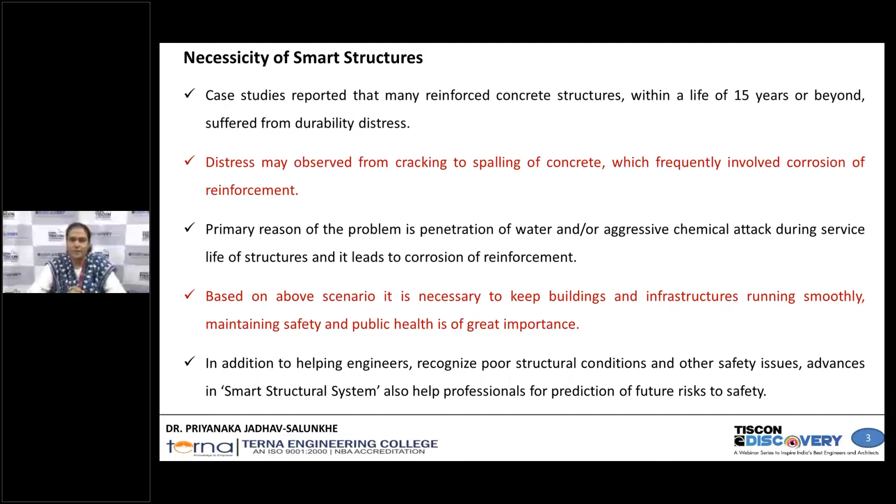Now let's see the concept of the smart structure. This smart structure system or community is fairly new, that's why many engineering professionals are attracted to it because of its innovative technologies. This smart structure incorporates the sensing phenomenon, actuation, along with electronic transfer processes, as well as we can say the control unit.

This new generation of system shows innovative functions such as sensing, actuating, along with shape morphing, vibration control, buckling control, along with advanced structural health monitoring. In addition, these smart structures develop special stiffness and strain in the structure which cannot be seen in conventional materials or conventional structures. This is the plus point of using a smart structure. If we want to define a smart structure generally, it is a structure which is able to sense external stimuli and act appropriately according to those changes to control the structural responses.

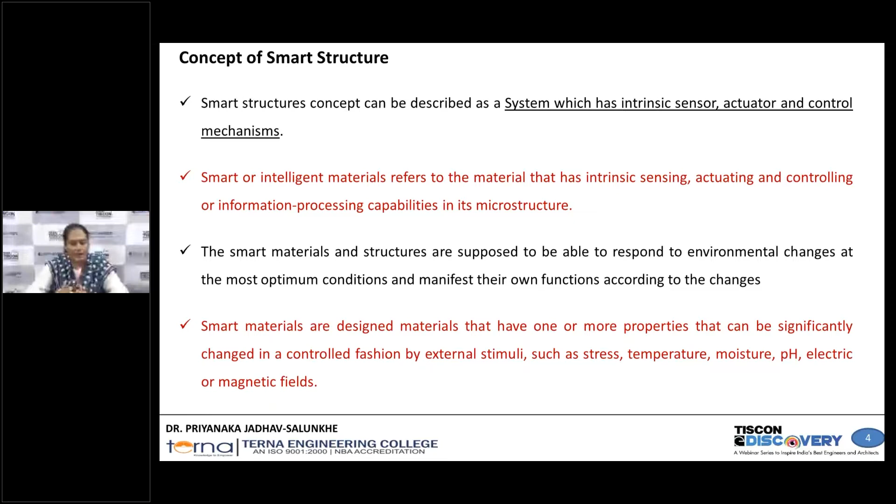Now let's see what is the current need and what is the current program set out to develop smart structures. This idea of the smart structure is adopted from nature, and it is based on the stimuli and response capability of living organisms. At the same time, researchers are taking effort to develop this system based on the example of mimicking living organisms. For example, take the example of a human body - the responses and stimuli of the body are controlled by the brain with the help of neuron systems present in the body. So based on this research, based on this theme, researchers are developing smart structures.

Let's see what is the ultimate aim, or what is the focus behind that.

Ultimately there is need of a structural member that possesses enhancement in the deformation capacity and ductility, higher damage tolerance, decreased residual crack size, and recovered or reduced permanent deformations. These are the functions we can expect in smart structural systems.

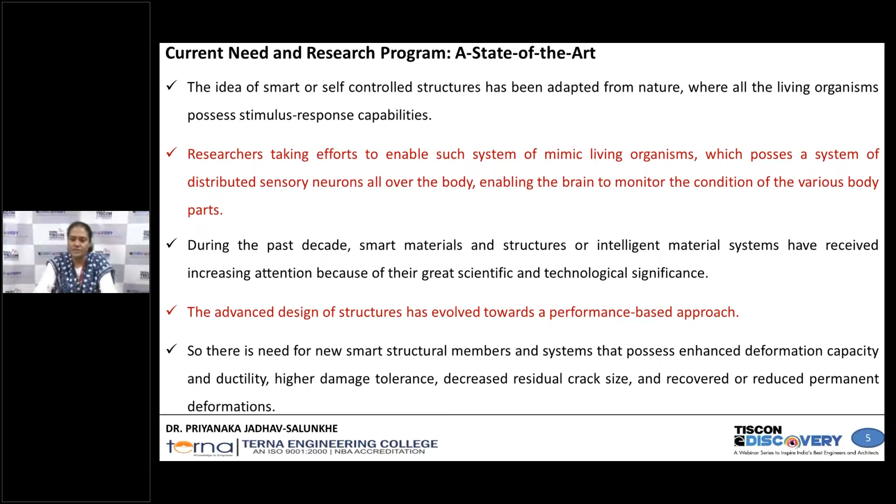Similarly, if we compare this life example with structures, suppose we use poor building materials, or conventional materials, with no monitoring, no preventive measures, no timely repair and restoration or rehabilitation of the structures. What happens? It results in the short and unsafe life of the structure.

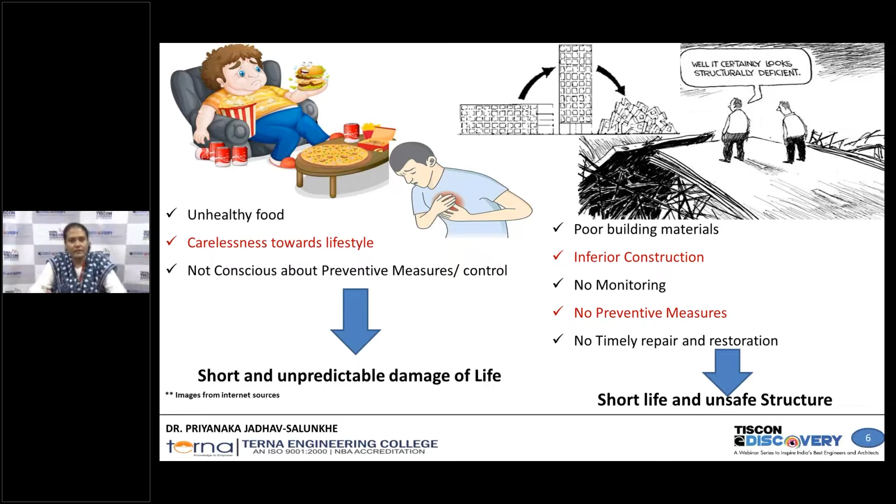Similarly, if we compare this human anatomy with the smart structure, if we use smart materials, there is regular and real-time monitoring of the structure. Preventive measures will apply, and timely repair and restoration of the structures is possible, only due to the use of smart materials in the structures. And it results in what? Long and safe life of the structure.

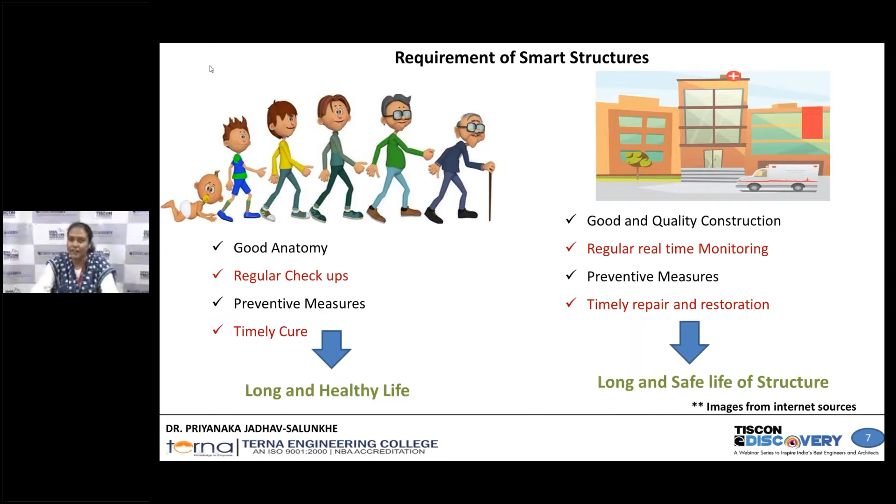So this structural system can sense the external stimuli in terms of stresses, strains, maybe vibration, etc. Corrosion potential is also there, electric magnetic field, based on different properties. So this external stimuli can be sensed by the sensor, and this sensed stimuli is transferred to the electronic transfer system, or we can say transferred to the control unit.

Here, after analysis, the control function can be provided to the actuator, and the actuator will behave according to the control functions, and the particular stimuli can be controlled. So this is the loop system, and this overall system is called a smart structural system. Here we can control the responses in terms of motion change, vibration, deflection, surface tension, etc.

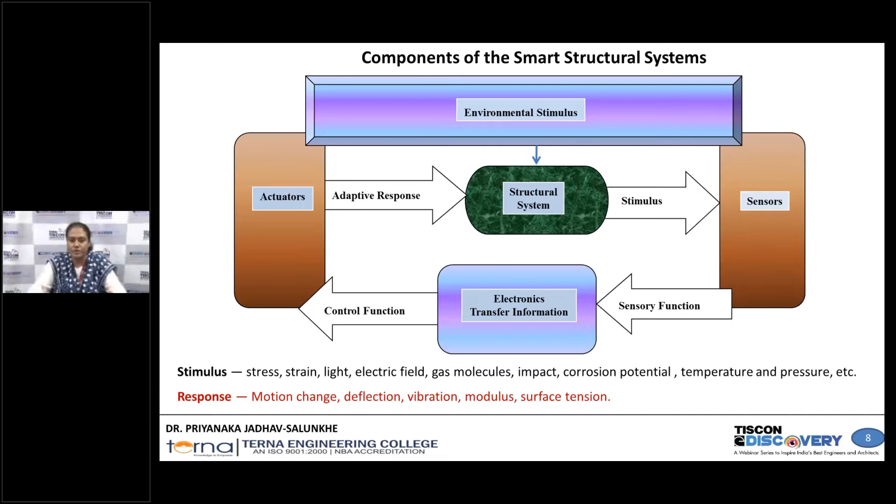Now let's see the classification of the smart structural system. As I discussed, based on its working phenomenon, this structure is divided into different parts or points. See, smart passive system: this system has the ability to respond to stimuli and behave in an appropriate manner without any assistance of a control unit or feedback system.

In the active system, smart active system, this system utilizes the feedback loop, and after analysis the control can happen, so this system is called a smart active system.

Now what is the smart intelligent system? It is exactly similar to the smart active system, but the system itself is able to control the external stimuli and the responses as per the demand of that particular structure. So it uses the nonlinear properties of the sensors as well as actuators. This is the very advanced intelligence system, that's why it is called a smart intelligent system.

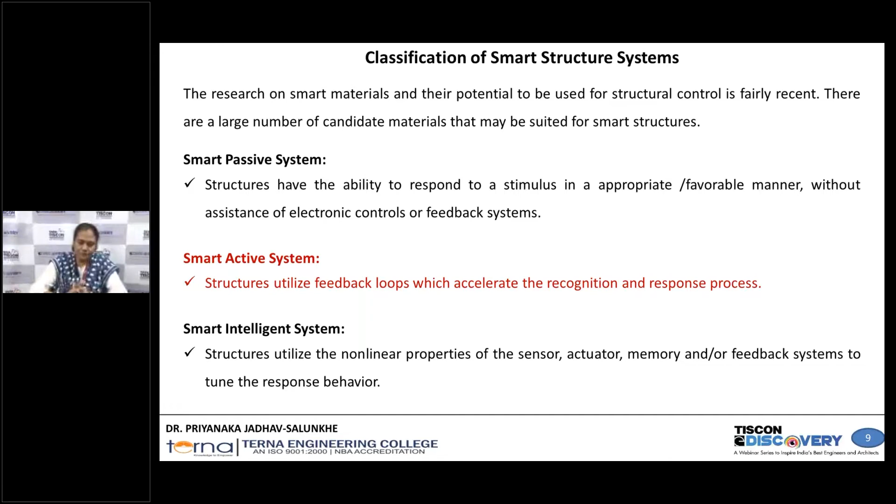Now let's start the discussion regarding smart materials. There are different materials available, for example, smart piezoelectric materials, shape memory alloy, magnetostrictive material, electrostrictive materials, magnetorheological fluids, electrorheological fluids, etc. Generally these materials are used in infrastructures and are suitable for use there. But in this webinar, I am focusing on the piezoelectric material and shape memory alloy simultaneously.

Now let's see what is meant by piezoelectric material. Piezo is a Greek word meaning pressure, and piezoelectricity relates to pressure-electricity. This material converts mechanical responses to electrical charges, and simultaneously, if provided an electric field, mechanical deformation may develop. These phenomena are called the converse and direct piezoelectric phenomenon.

So let's see the application of the piezoelectric material. It helps the structure to convert the force into electricity, to convert the vibration into electricity, as well as convert the temperature into electricity, right? This piezoelectric material can be used as a sensor as well as actuator because of its direct and converse piezoelectric phenomenon.

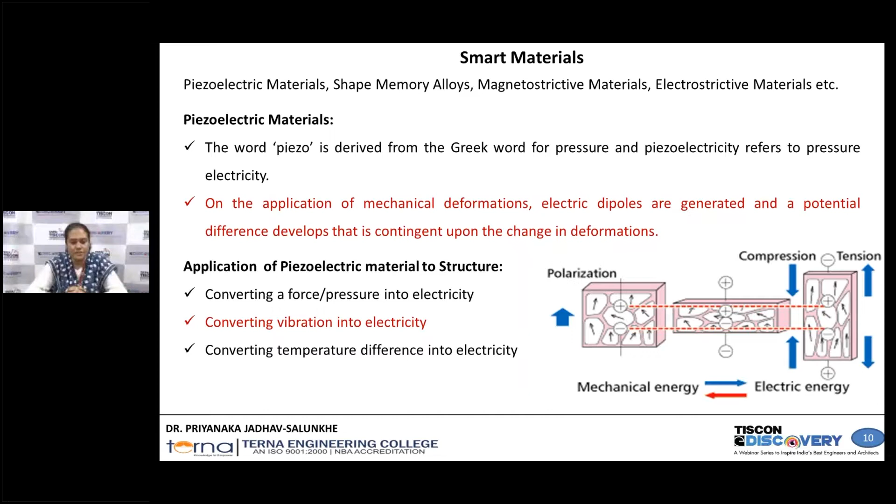There is a well-known piezoelectric material, that is quartz, but generally for structural engineering applications, the materials used are lithium niobate, zinc oxide, aluminum nitride, lead zirconate titanate, and polyvinylidene fluoride, that is PVDF and PZT. Generally, for structural engineering purposes or for infrastructure, PZT and PVDF give good agreement of results.

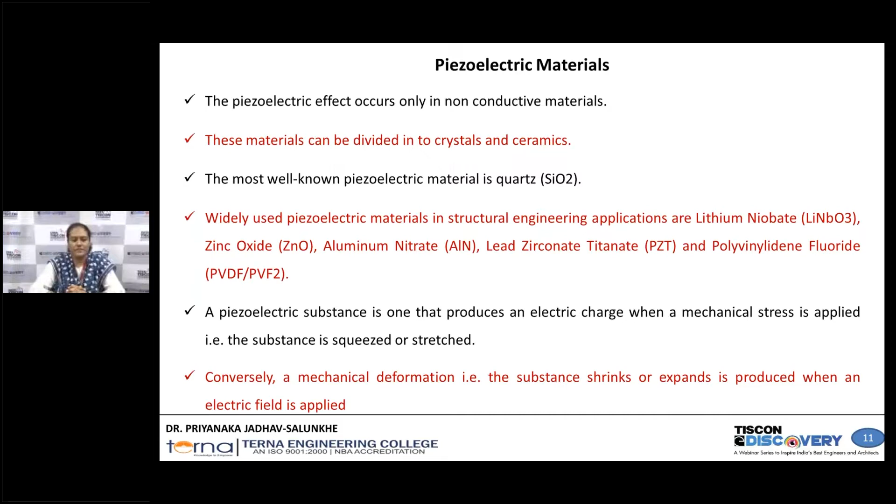So, as I explained, the phenomena of the piezoelectric material, the converse piezoelectric phenomenon and the direct piezoelectric phenomenon, push this material to behave as an actuator as well as a sensor respectively. Now here I would like to highlight the use of a piezoelectric material with the help of a case study from Israel. In Israel, they applied piezoelectric layers or rods in the highway, and they made a smart highway using the piezoelectric material.

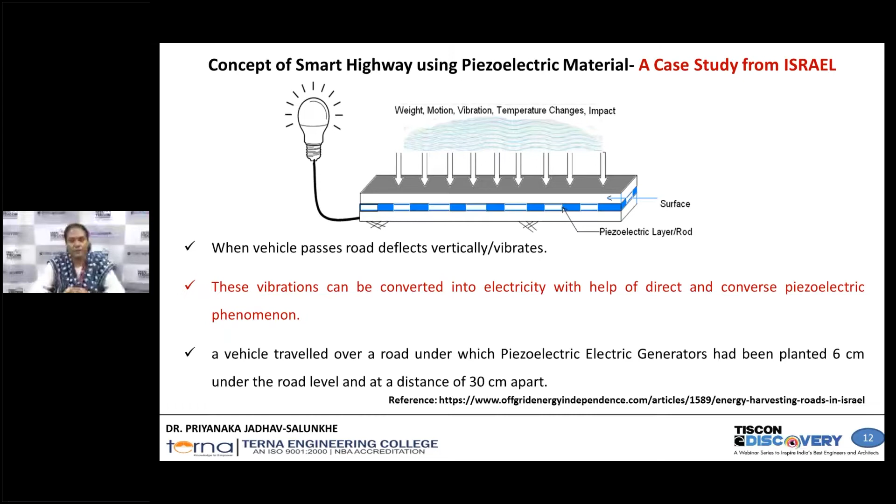In that smart highway, they planted the piezoelectric generators 6 centimeters under the road, at a distance of 30 centimeters apart. This generator harvests the mechanical energy from the vehicle, and it is converted into electricity and stored. From 1 kilometer of one lane of piezoelectric road, they produced 44,000 kilowatt hours per year of energy. So this is a very good alternative to generate energy from smart infrastructure.

There are limitations, because awareness of this piezoelectric material is very low and its expertise is very limited. At the same time, the standard specifications are not yet developed. So these are the limitations, but in the near future, it is possible to have those standard specifications.

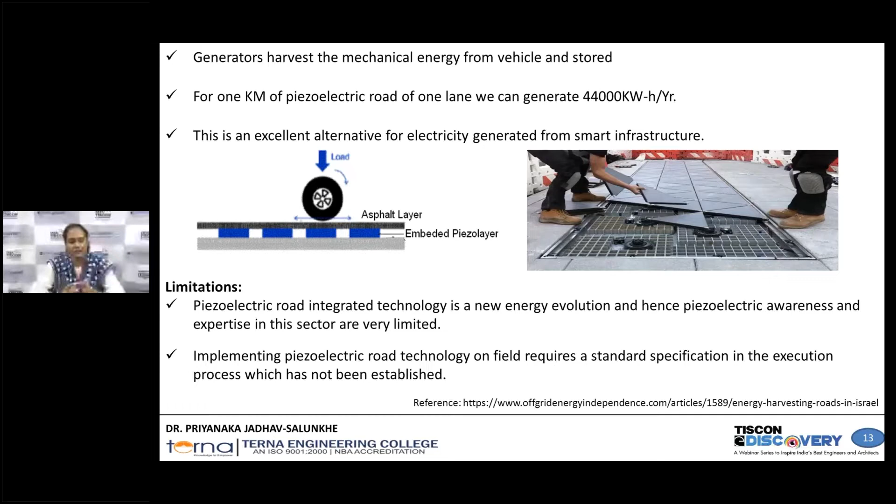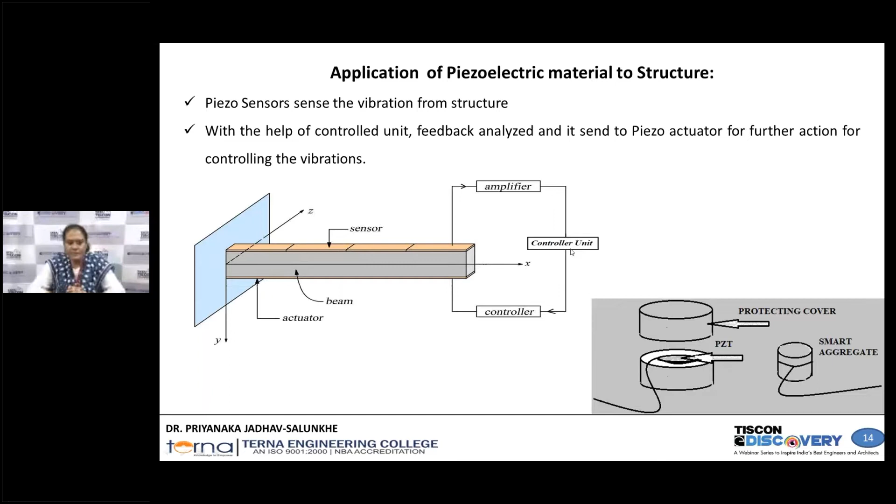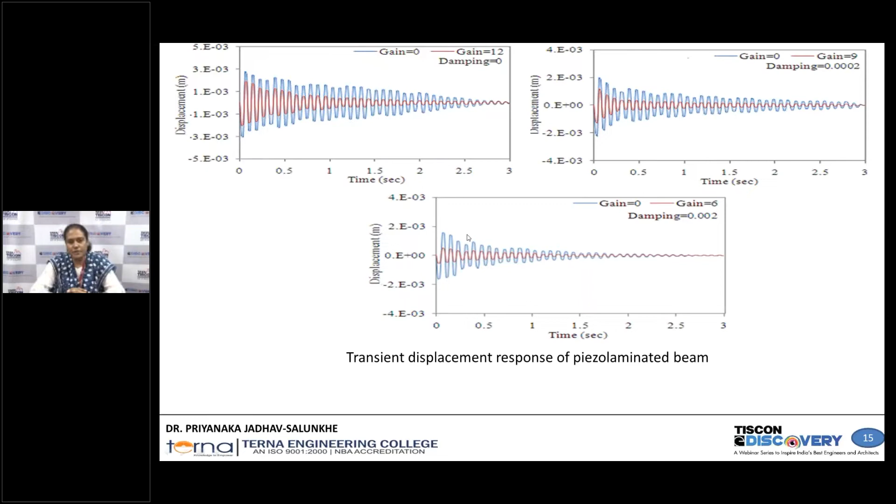Now let's move towards the second material, that is shape memory alloy. Here I would like to discuss the iron based shape memory alloy. A shape memory alloy is a material that remembers its original shape, and if it is deformed, it recovers its original shape immediately upon heating or upon unloading.

There are different types of shape memory alloys available: copper based, nickel based, and iron based shape memory alloys. Copper based and nickel based shape memory alloys are on the higher side in cost. So the iron based shape memory alloy is a low cost material, and it gives better results compared to conventional reinforcement or conventional materials.

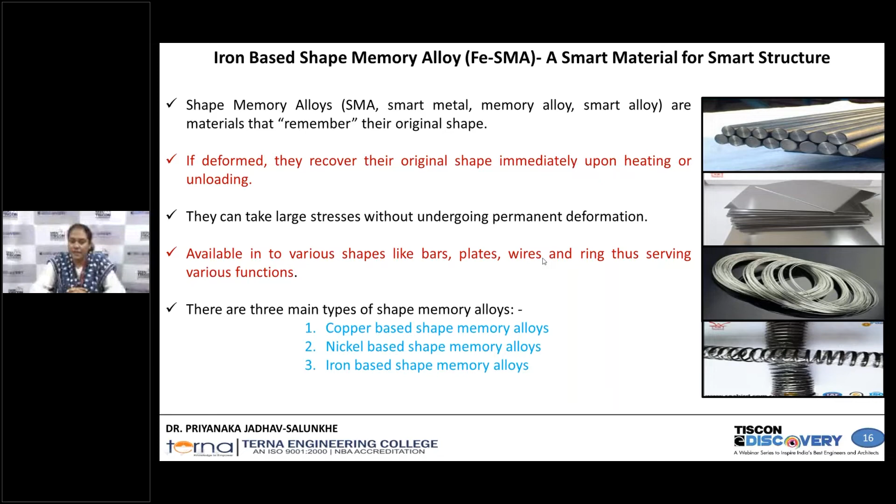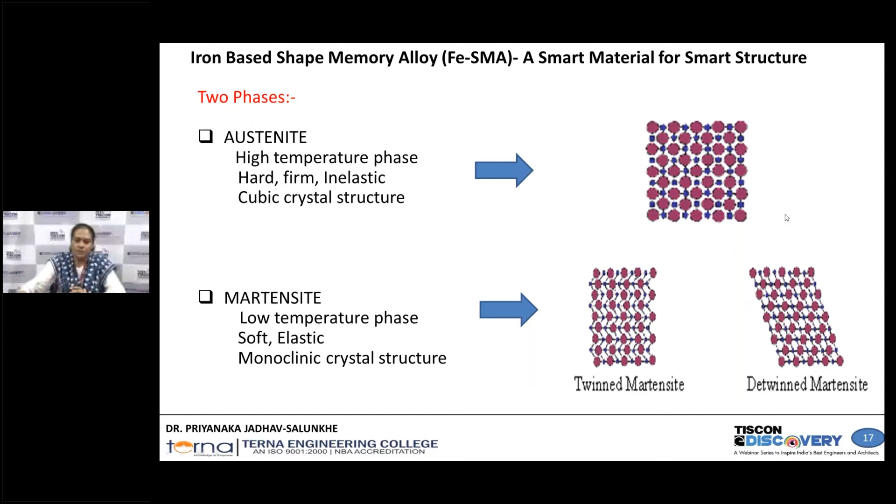Suppose we stretch the spring, so this spring gets deformed. After deformation, we put that spring in the plate with hot water. It regains its original shape. So it is the ability of SMA material to recover its original shape after being deformed through thermal cycling. So this is the phenomenon of the shape memory effect.

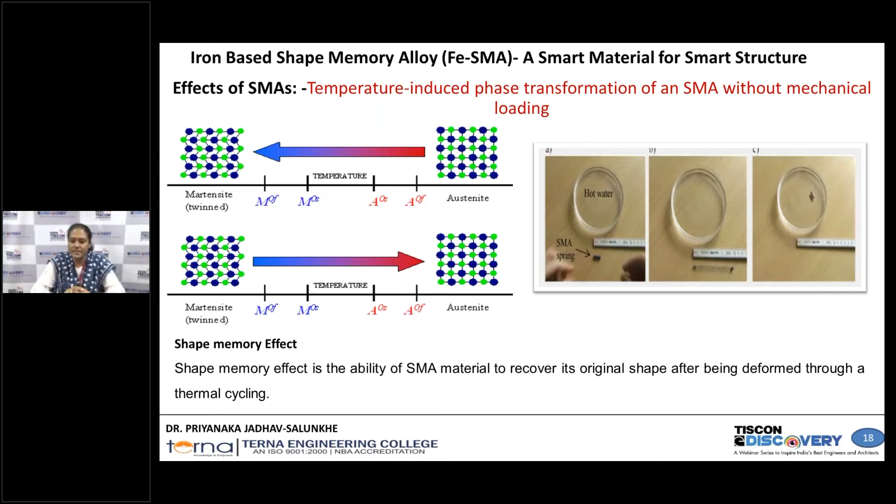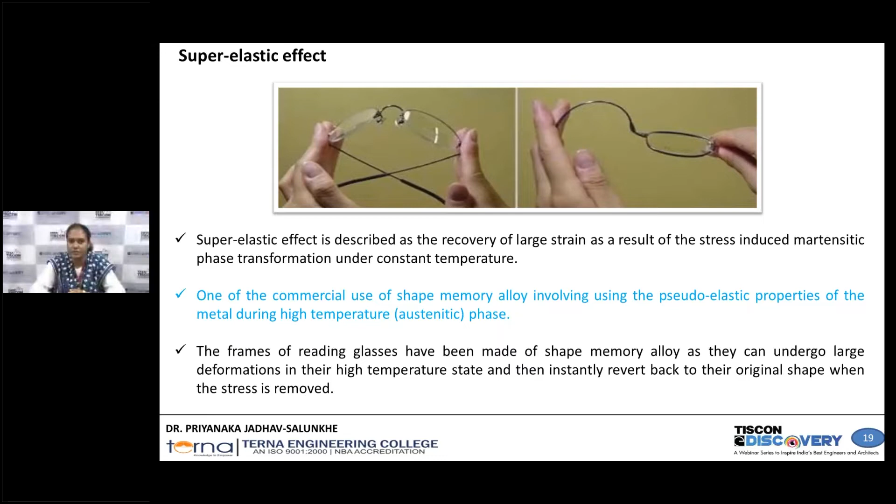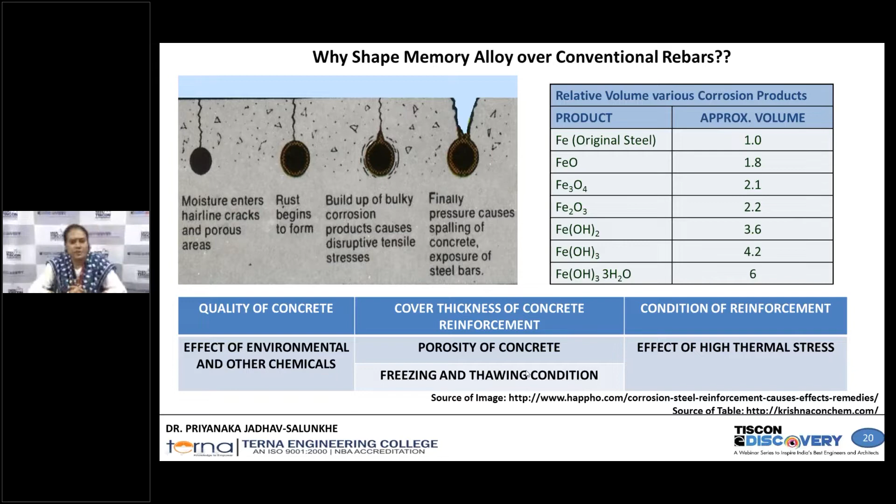What is the advantage of the shape memory alloy?

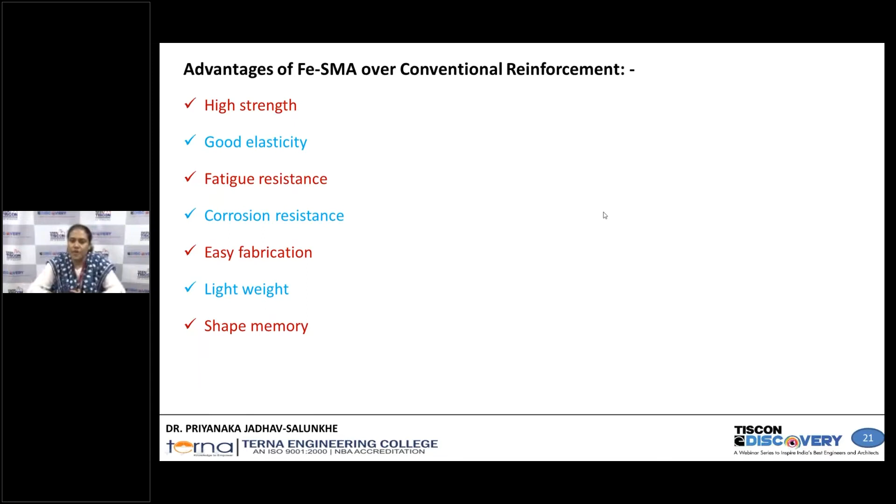Then corrosion: it is a good corrosion resistive material. It is easy to fabricate, it is lightweight, and it has the shape memory effect, meaning the material is able to regain its original shape on unloading, or with the provision of thermal cycles. Now see, what is the application of a shape memory alloy? Where is it applicable? In bridges as a damper, in structures as anchorages, as well as in bridges as confinement. At the same time we may use it as bracing also.

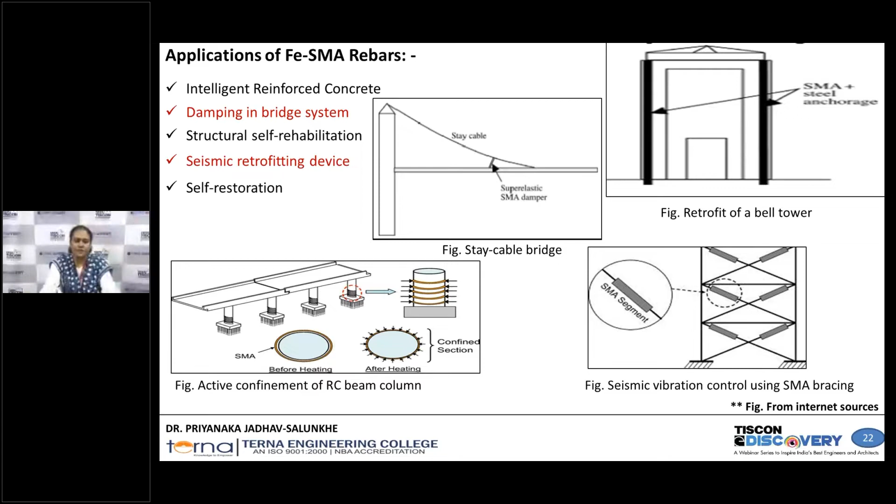In the bracings used in structures, we may also use the shape memory alloy. At the same time, we use it as a reinforcement bar in the structure for regaining the deformations as well as regaining the stresses from the reinforcement bars. Now, I discussed the piezoelectric material and the shape memory alloy material. Now let's see the application of this shape memory alloy in the structure.

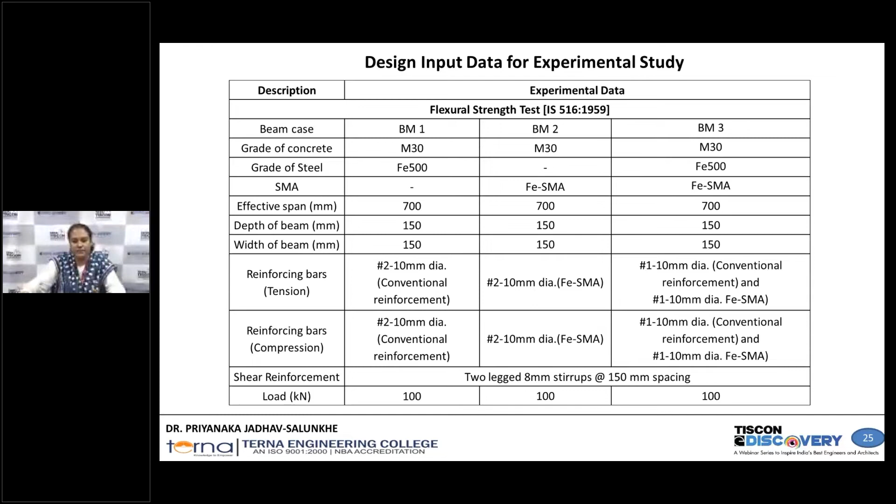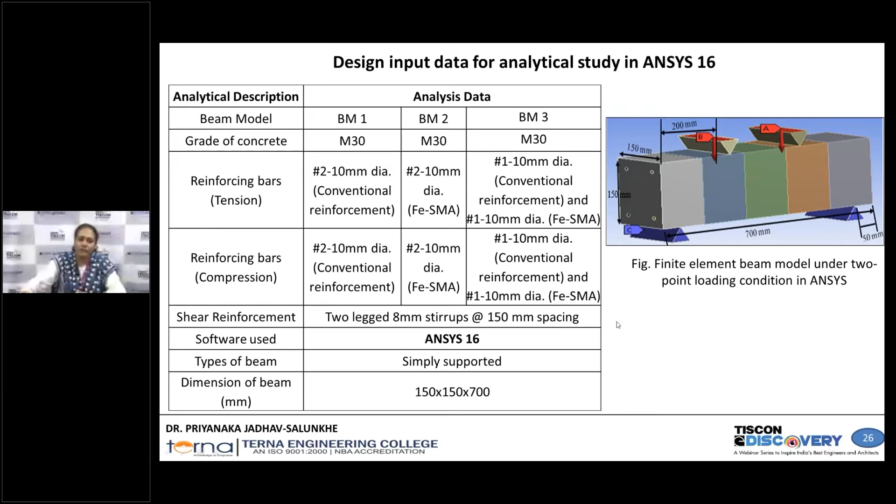For modeling of the concrete, we used the SOLID65 element because that element is compatible with that particular material. For conventional reinforcement, we used the LINK8 element, and for Fe-SMA reinforcement, we used the LINK1 element. And these are the material properties we used for the modeling of the beam in ANSYS. These material properties we took from the references, and at the same time from the manufacturer also.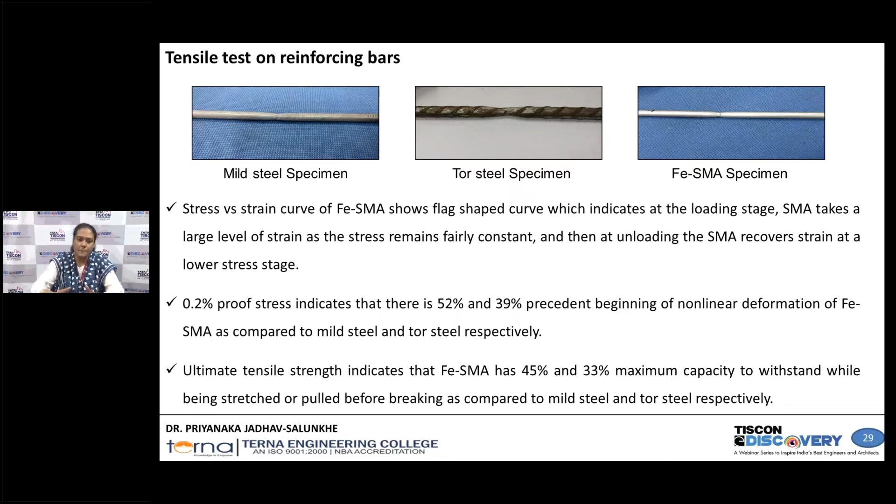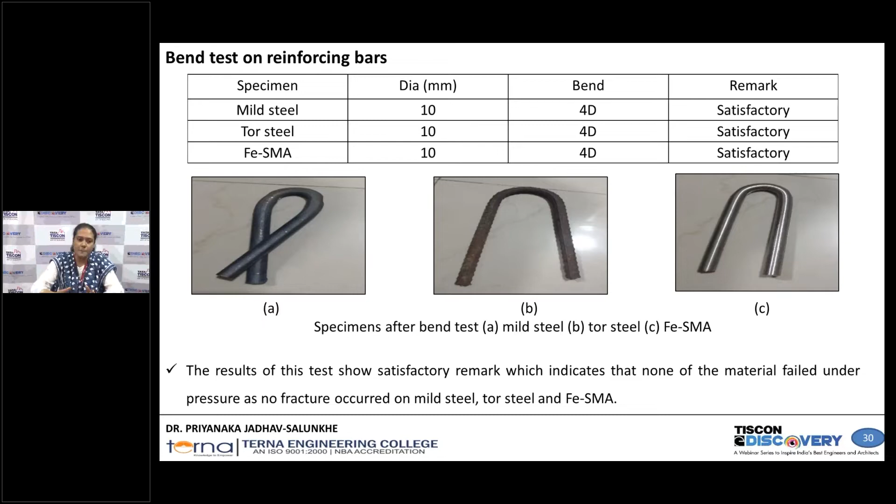Also, we carried out the bend test of the reinforcement bar, and it is satisfactory for all materials, that is mild steel, Tor steel, as well as the Fe-SMA reinforcement bar. Now, the main point, corrosion. Because in a smart structure, we are focusing on corrosion also. That is a very important phenomenon.

But if we come to the Fe-SMA reinforcement bar, slight red pitting was observed on the cutting edge, but that can be improved with improvement in the manufacturing processes. So here the Fe-SMA reinforcement bar shows more corrosion resistance as compared to the mild steel and the Tor steel. Now let's see.

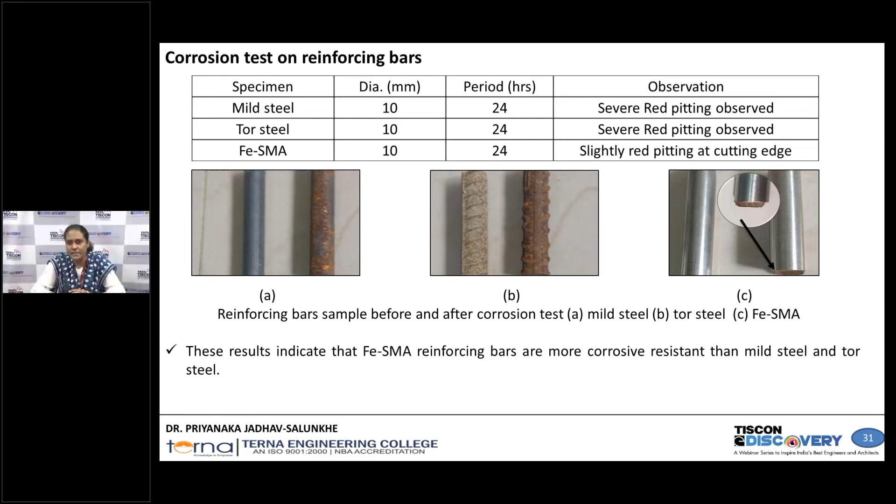Here, as I discussed, we carried out the flexural testing on the RC beam. The flexural strength we received for BM2, that is the RC beam with SMA reinforcement, is 43% greater than the RC beam with conventional reinforcement. So we can say, if we use a smart material, for example shape memory alloy, in the reinforced concrete structure, it enhances the corrosion resistivity, plus it increases the strength of that particular structure.

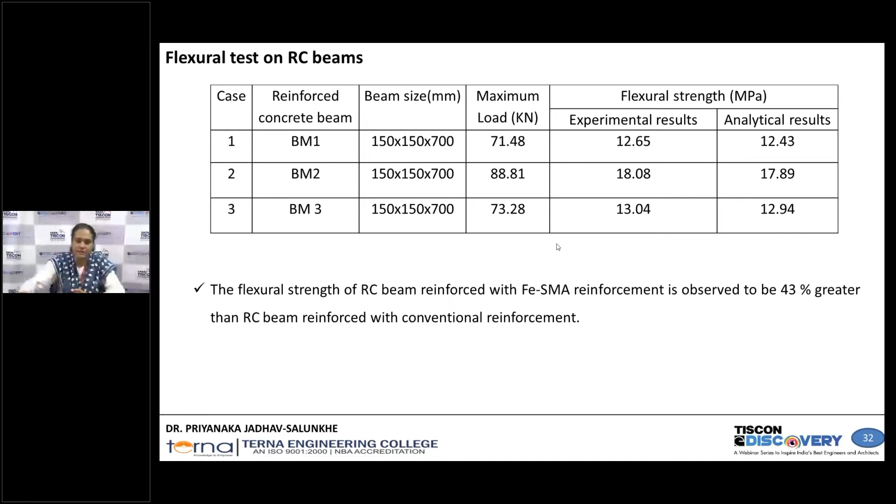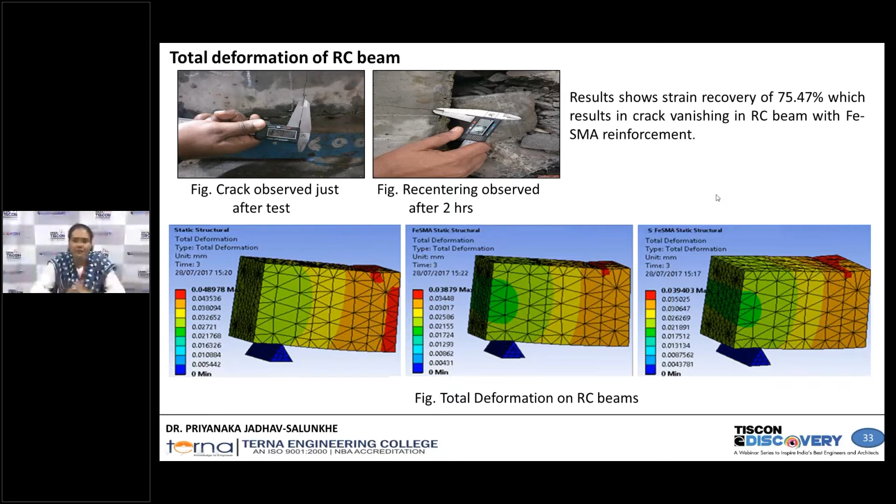So 75% of the strain recovered in that structure, and the same results we compared in ANSYS also. Now let's come to the point of the fatigue life of the reinforcement. Here we carried out the fatigue analysis also, because the structure has fatigue loads, that is, small load cycles getting applied again and again continuously.

So what is the resistance to the fatigue? Again, in a Fe-SMA reinforced structure, we received the highest fatigue life, that is 86% greater than the conventional reinforcement, as per the analytical studies.

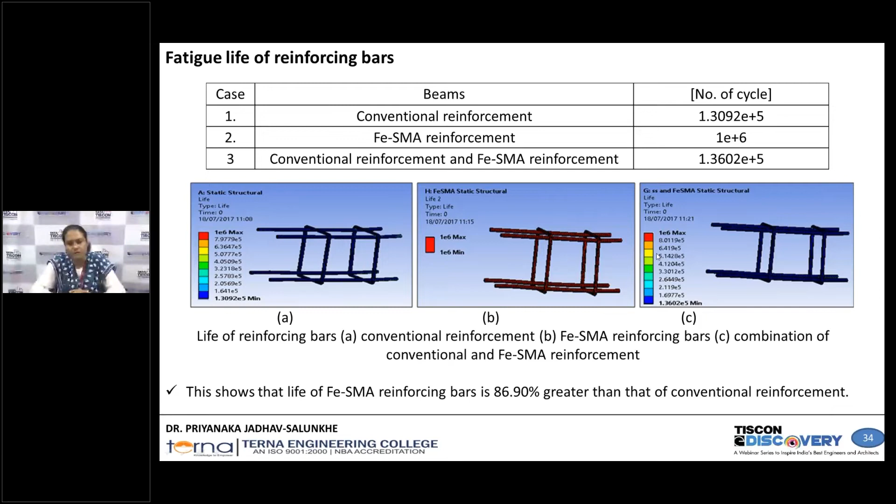Now let's move towards project number 2. This project is based on the nickel based shape memory alloy, which is used in concrete. Here I want to check whether it is possible to regain or recover the cracks developed in the concrete. For this particular project, we received assistance from the R&D lab ACC Cement Thane.

For this project, we purposefully used recycled fine aggregate concrete, because that is the weakest concrete ever, and we are trying to enhance the strength of the recycled fine aggregate with the help of shape memory alloy fibers along with electromagnetic water. Here we used two smart materials: one is the electromagnetic water and the other is the shape memory alloy.

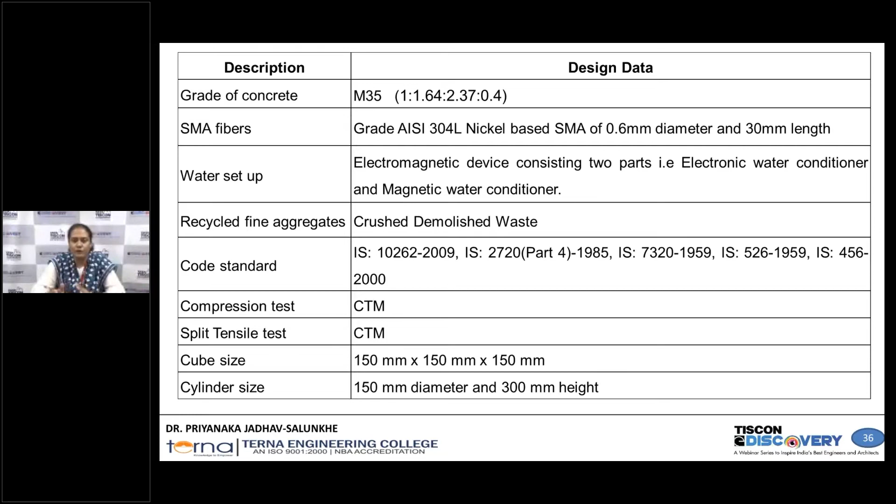As I discussed previously, here I used a nickel based shape memory alloy, because the same project was carried forward to elevated temperature. The same material was subjected to elevated temperature, and for that purpose the nickel based shape memory alloy gives good agreement of results. In this same project, we used electromagnetic water to increase the workability and the compressive strength of that particular concrete.

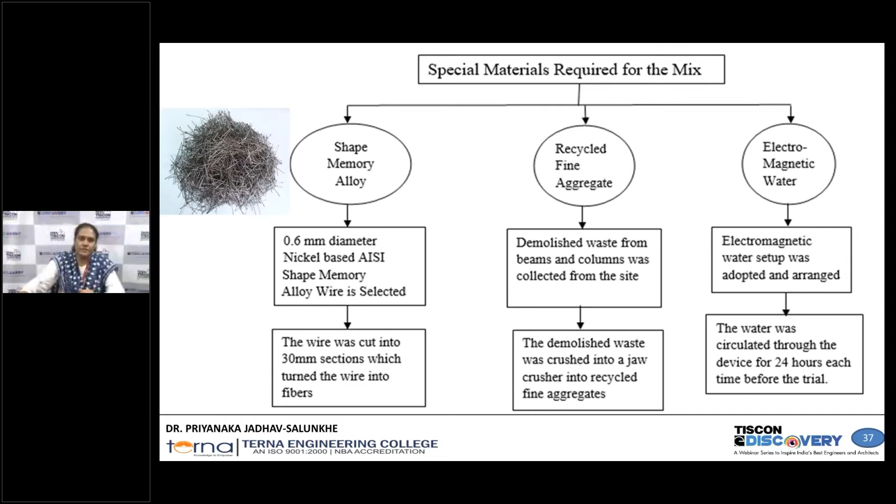See, here the setup of the electromagnetic water is given. What is electromagnetic water? The water passes through the electromagnetic field for the purpose of reducing the calcium ions and other minerals, and its focus is to reduce the concentration of those particular ions. The water is circulated through this device for 24 hours, and after that the water is called electromagnetized water. It helps the concrete to increase the workability and the strength.

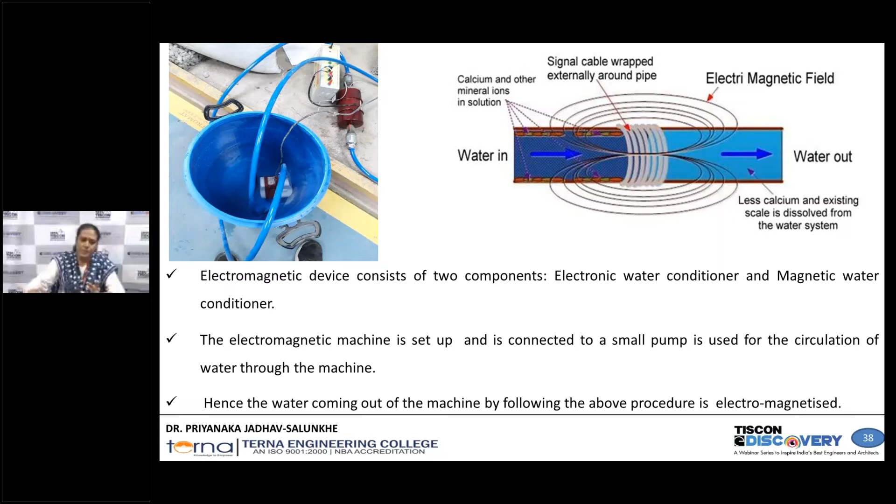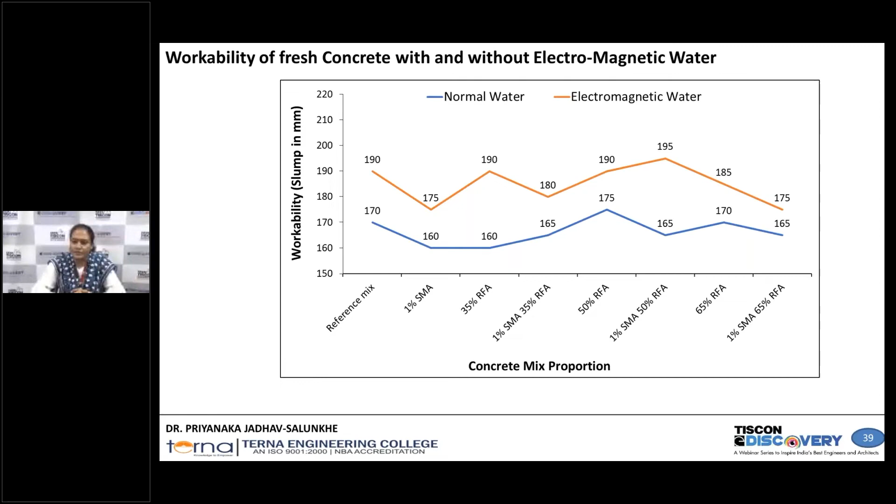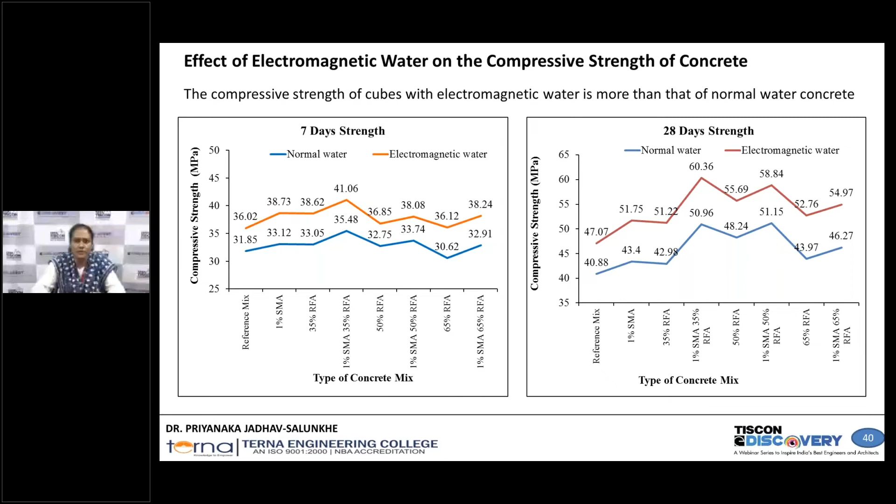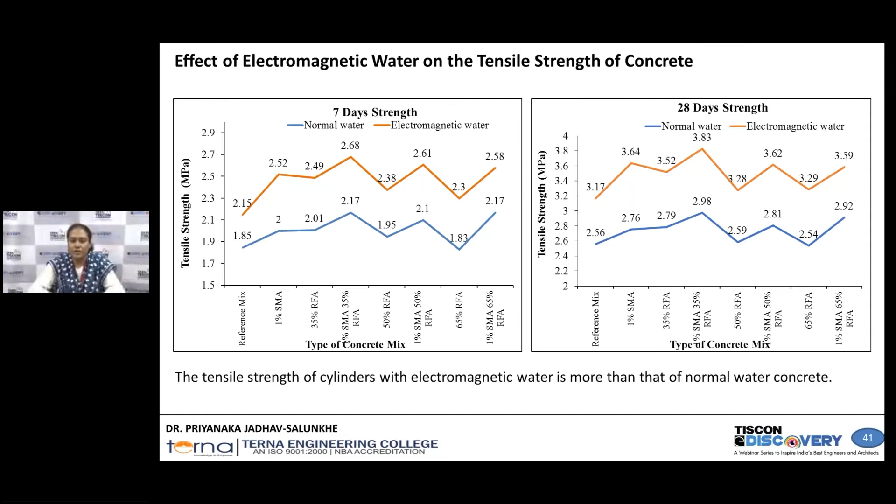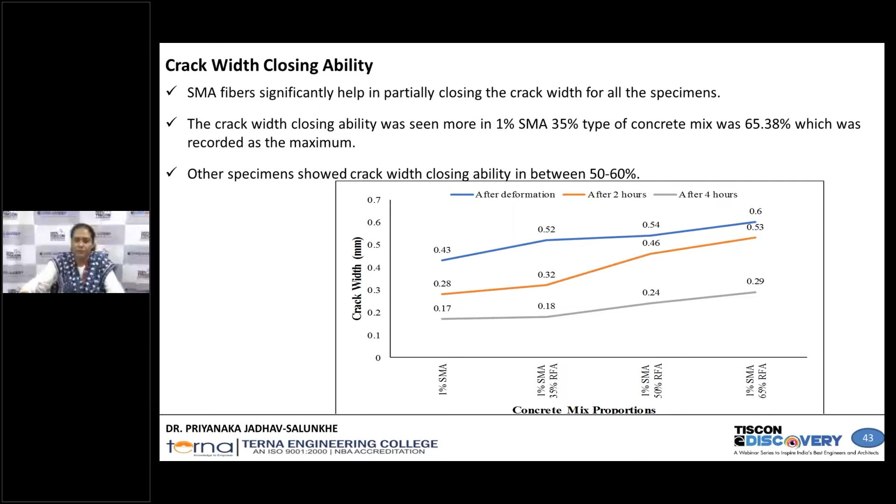Now let's move towards the third project, that is the effect of elevated temperature on recycled aggregate concrete with shape memory alloy. The next focus is to check whether the shape memory alloy fibers react to the elevated temperature, and what is the performance of these fibers when subjected to elevated temperatures of 400 degrees centigrade and 800 degrees centigrade respectively.

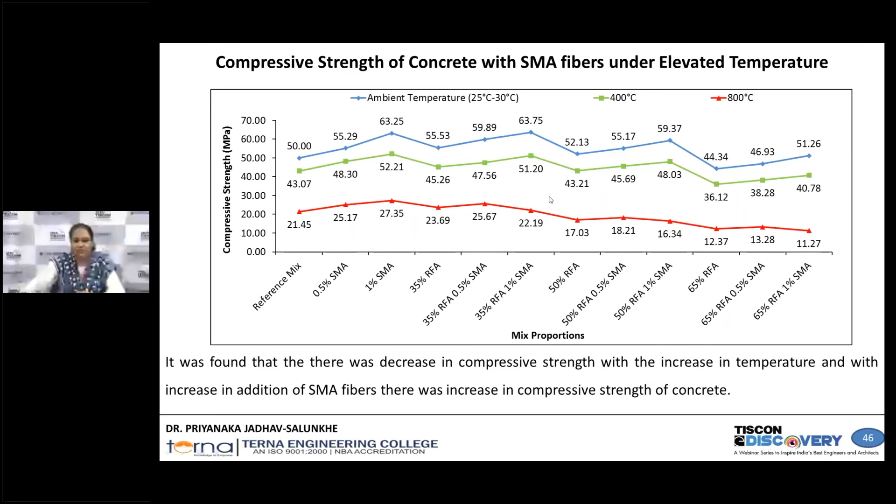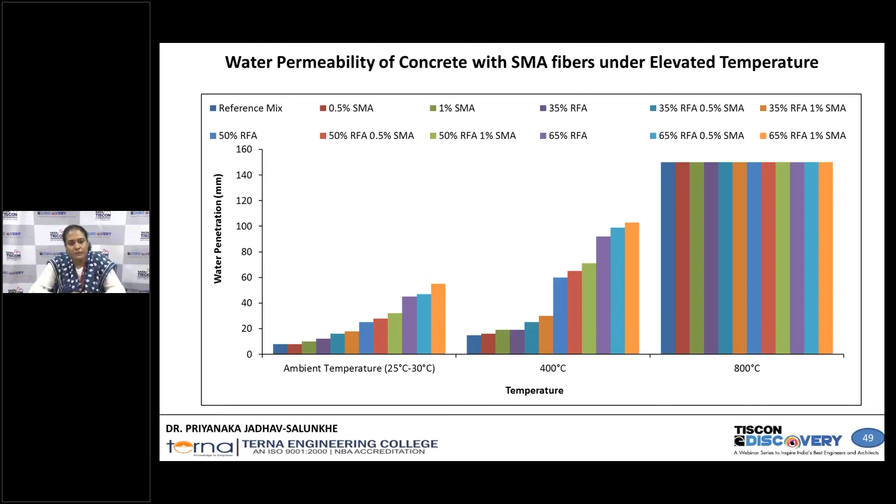So here I would like to highlight that if we use smart materials in the structures, it is possible to enhance the extra stiffness, extra strength, durability performance, as well as the corrosion resistivity along with a recentering ability. See, here I discussed the passive structural system, because SMA is related to the passive structural system; it does not require a feedback loop, because this material itself is used as a sensor as well as an actuator.